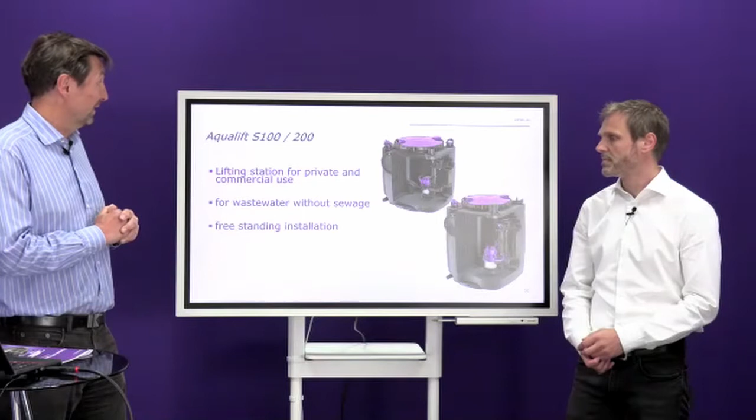At first, let's see what we have. We will show you the Aqualift S 100, 200, a lifting station for private and commercial use, so for both areas. It's important that this is for wastewater without sewage, not black water, so for gray water or rainwater. The third important thing is that it's a freestanding installation. We have a lot of products for installation in concrete, but now it's a product for above the floor. That's the important thing for this product.

What we want to show first is why we need this product, so let's look at the application. You see here it's in combination with the grease separator. It's a really interesting application because we all know we have a good bundle of products: grease separator, sampling chamber, lifting station - for example our Aqualift F or Aqualift FXL. But not all applications require a lifting station or pumping station for black water. This is a really nice example and a nice bundle that comes together.

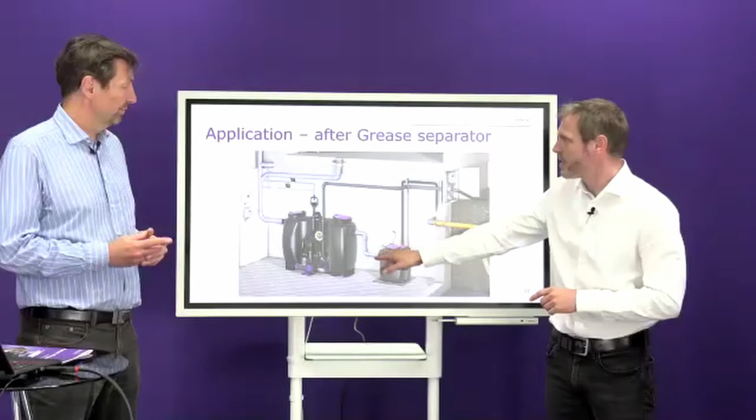Martin, do you see here, do we miss something? Oh, I see there is the outlet connecting to the lifting station. I guess, so in the training I always say you need a sampling chamber. Correct, after the grease separator. So it's forgotten here. I don't know, who did this drawing? I'm not sure, but you will explain me, I think. I think we will explain that because it's a nice feature that comes together with this product. And it's not a mistake in the picture.

So we have nice additional information for you regarding the sampling chamber. Most of our partners already sell a lifting station after the grease separator. Our Aqualift FXL is mainly for bigger separators, but now we have entry products for the smaller sizes of grease separator. Now we can offer a really cost-efficient, affordable lifting station for these sizes. We are really excited in the whole Kessel group to have this product now. It comes in 2 tank sizes.

We will show you more in detail later. This one here is especially a 200-liter tank, and we prefer the 200-liter tank, especially in this application. Later we'll show you some other application possibilities. But in this special application with the grease separator - NS2, for example, NS4 or up to NS7 - depends, but up to NS7 could be the right solution for you if you have such an object where you need a lifting station after a grease separator. So keep in mind, that's a lifting station for grease separator from NS2 to NS7.

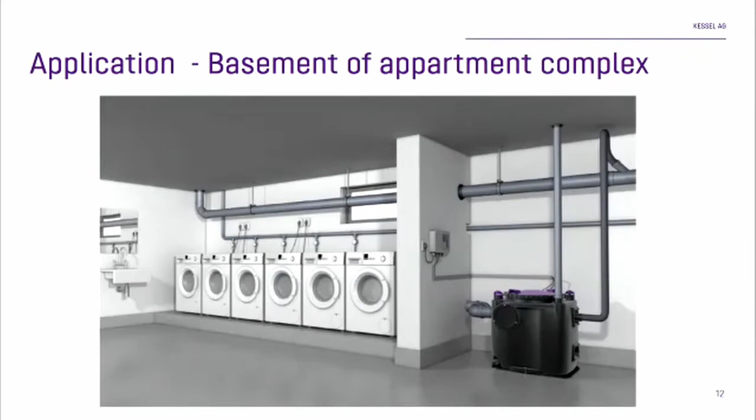I think it's very common - you see there in multi-story buildings, apartment complexes where they have the washing machine in the basement, then mainly they need a lifting station, right? We all know our mini lift. For example, if you have a private house, one family house, very often if you need a lifting station for a small amount of water - only one washing machine or a hand wash basin - water comes in. But if you have more water going in where you need bigger storage, this Aqualift S 100 or 200 could be the right choice in this application. And much more - there's a big amount of possibilities where you can use this product.

For example, if you have rainwater, thinking about parking garages, or rainwater in general, where you need a storage volume for that. But also in commercial buildings like offices and so on, where you have gray water that comes in a bigger amount, this bigger storage could be the right choice.

Right, so there we have already the entry product, the mini lift. Here we have the bigger size of that. So in this area, we have now a better solution for more volume, more flow rate. It's a new opportunity for you. If you have 10, 15, 20 washing machines, bigger complexes, could be the right choice. So the maximum, what would you say? Depends, but if you have 15 to 20 washing machines, for example, could be the right choice.

Yeah, that's very common in Germany, that you have washing machines in the basement altogether, right? And then you need a backwater protection, and you have to lift it. Here you see the drainage line to lift it over the backwater level into the sewage.

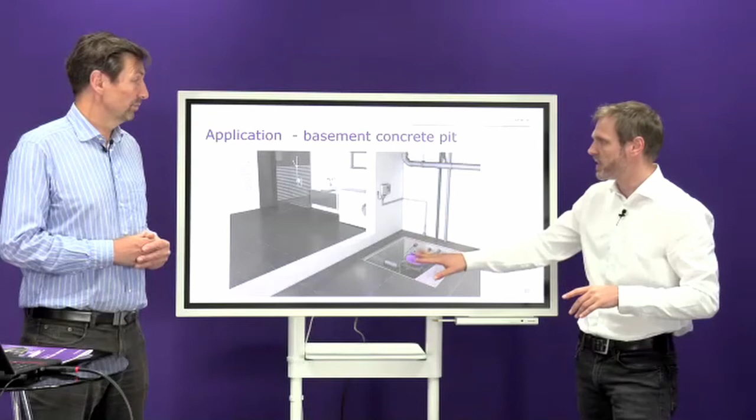Just one example, another example for how to use it, private or commercial, anyway — freestanding lifting station for gray water. That's now the answer for concrete pits.

But very often, another example, if you have safety valves for the drinking water pipe that goes inside the house, or back-flushing valves where you have a bigger amount of water that comes in such a tank, like 100 liters, a mini lift could be too small because the pump always goes on and off. You need a bigger storage volume. This could also be the right choice for such a product.

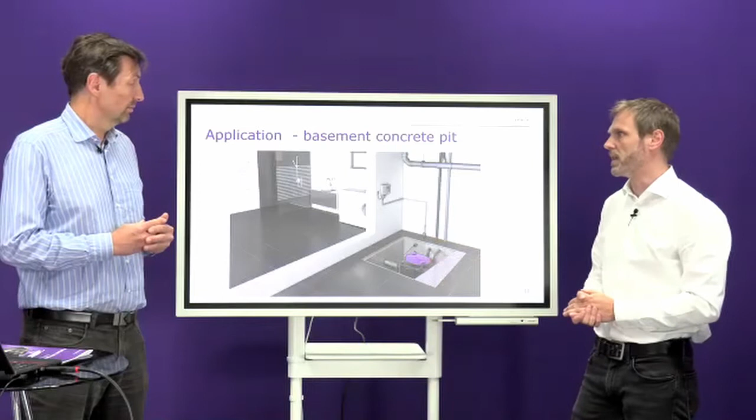Yes, let's go now into the details, what we have, how it looks like. Here are some figures or details already described, but let's go to the product. We also have brochures, Martin — you'll mention that later on? Yeah, later on I'll mention it. So you'll find all these advantages, USPs, and so on in the brochures. But I think that's why we are here — let's go more close into the detail of the product and let's show the product.

Let's go over. Okay, Martin. Okay. Yes, here we have the two-tank version.

First of all, that may be interesting for you if you order such a product — this is really a big advantage at Kessel. It comes in a really compact package. You order one article number and you will have all the products and all the parts you need to be ready for installation — the pumps, control unit, whatever — comes in one package. You order one article number, you have one product. Also, this is really important, it's a compact system.

So if you want to install this product in a basement, for example, very often you have to lift it, you have to handle it. It's really not that heavy.

So it's, but you're strong. Let me try. Yeah, yeah, okay. You look tired, but okay.

Later on we will show a competitor product, ACO. You may not have heard about it, but we want to show it as a competitor product.

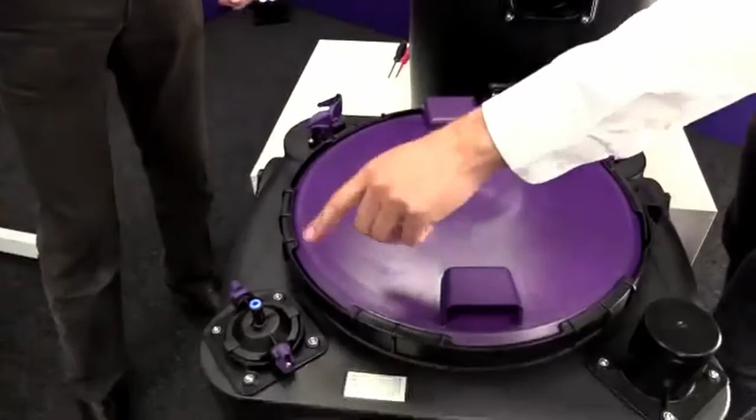Okay, please open it, we want to show what is inside. Let's go around it - we can do it on this bigger tank since the application is nearly the same. What you find on top of this product may differ; sometimes you see this clamp, or this one. The difference is because we have different versions here.

This is a mono version that comes with a floater switch. This is a tronic version with a control unit. There we have this pressure connection and this transparent hose - later on we will connect everything together so the product is ready.

But first, let's go the way of the water. If the water comes in, you need an inlet. We have three possibilities for the inlet. First, this big area in front of the tank can be drilled with our system using the hole saw, up to dimension DN100 or DN150, a typical inlet used here.

If you don't want to drill, because you don't know how big the hole should be, we have two other options - on the right side, and on the left side you see this plate that can be opened, where a prefabricated plastic inlet part comes with the product and can be directly installed. So you can use the inlet on this side or the other side, and you don't need to drill anything. Later on we'll show you this.

So this is the inlet - water goes in at the bottom part. You have this fixation so that once the product is installed, it doesn't move anymore, and the connections will be fitted properly.

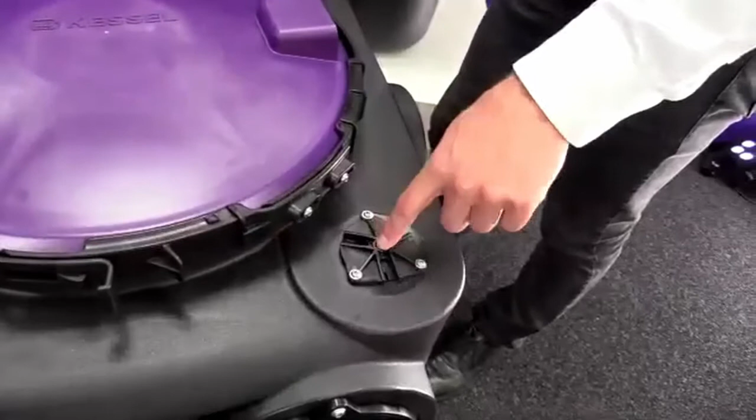Very important. Then we have the possibility for the cable outlet, and it's not a standard cable gland. Very often you find products with standard cable glands, and if you have a plug on the pump, for example, very often you need to cut it just to bring it through. It's a big hole, you open it, and you can install all the cables that are necessary for the inlet here, bring it out. Very easy to do. Two cables, two pumps, right? Two cables, two pumps, exact.

And on the other side we have the connection - this is the double version with a control unit, and this is the connection for the pressure, for the pressure sensor system.

So you can really easily open with this - it's new, you don't need to use a tool to open this, just two clamps, and it's easy to remove, especially for cleaning. It's very often, if you have grease separators, you need to clean it. It's very important, when doing maintenance, to clean this pipe for the bigger diameter, less blockages.

So that's mainly good for grease separator applications. And also on the top we have a quick connection that may be known from installation systems. If you have this pressure pipe, just plug it in, that's it, no need anymore for a thread like the older system. We know that most of our customers know that.

And we transferred it to all the other products as well. That's really important - during this year we will change it on all our existing pressure systems, whatever comes with it, on the control units, on the Aqualift F, XL, and so on. We have this really easy click system, plug it in, and this little untightness we had in some cases, this could never happen anymore. Is that right? Correct, yeah, right. Absolutely tight, easy to do, plug and play.

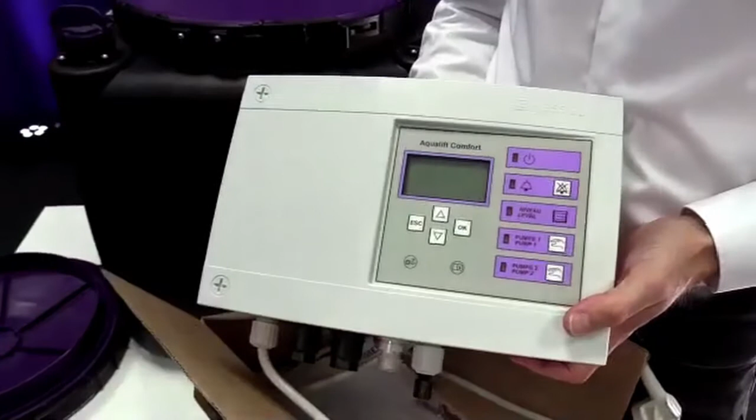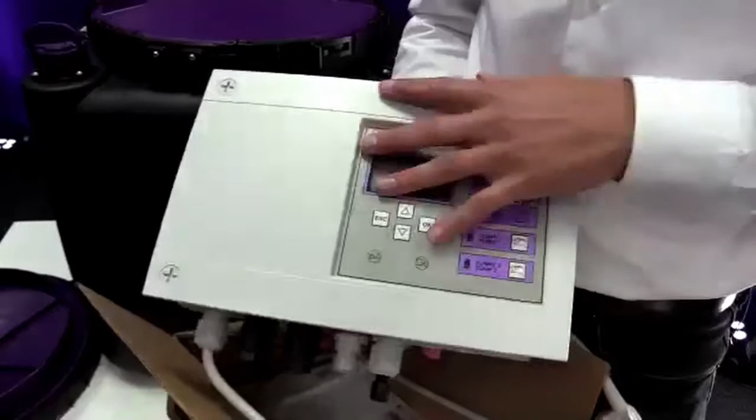We know that from our other products. So we have here our display. We have our languages where you can choose, and you get messages over the display. That is what we already have since many years. So nothing changed in the functionality, and you now can choose this special product, go into the product line and say it's Aqualift S100 and 200, say okay, and then it's great, already done. Okay. Martin, here you go.

Thank you. Let's look at the inlet adapters. As we mentioned before, for the side inlet, these are the adapters in DN100 or DN150. For example, if you have a grease separator NS2, the inlet is DN100, so you can use this one. And this is really interesting - or you can use for NS7, you can use this one.

And maybe, Martin, we will open it. I think it's maybe interesting. Should open the screws. Or you can open it just with screws.

Jan and Martin, we had a question coming in on inlet, so it's good that you're opening this so that people can see live how easy it is to get the required inlets done on site. And again, these are included with the system - so what you're showing there is included with the 200 liter tank. Yes, correct.

So it's Torx screws, so that you should have. This also is an important information - all the system comes with the same screwdriver, so it's the same size. If you want to change this one or this one or this one, it's always the same size of the screwdriver. So yes, here, and then you can install.

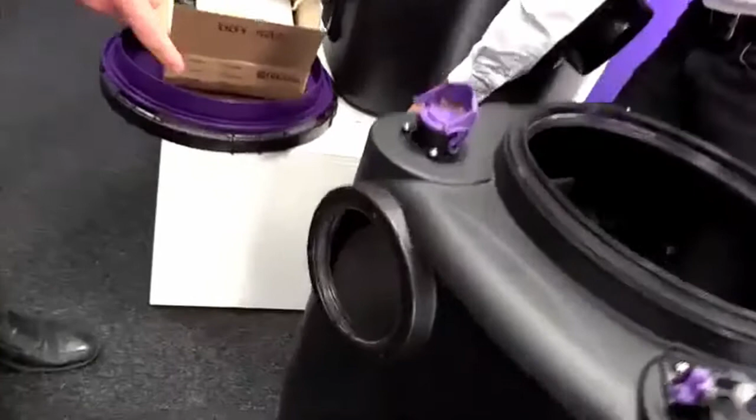The gasket is still inside - that's the gasket here. Of course, you need grease, and then - just easy, place it, put it in the right direction. I think we don't need to screw it in, just for example, and then screw it back.

And what is really interesting now, and this is something we want to show you with the camera inside - we talked about grease separators, and we said here we don't have the sampling chamber, and the sampling chamber is included in this lifting station. So you open the cover, you go with your sampling glass inside and put the sample out of this. And this special lens here and this special height of this inlet is regarding the norm - it's a norm-proofed sampling possibility. So you don't need a sampling chamber anymore after grease separators.

I think so, instead of a sampling chamber, you can invest the money in the lifting station. Correct, right? I think it's an interesting feature. Yep, and that's right. You're good. Okay, and next one is the pump.

I want to mention, these products come in 2 tank sizes and also 2 pump sizes, so whatever power you need. It comes with the GTF 600 and also the more powerful GTF 1250 - the names indicate how many watts the pump has. Here you see the performance curve of these 2 pumps: one reaches up to 8 meters, and the second nearly 11 meters.

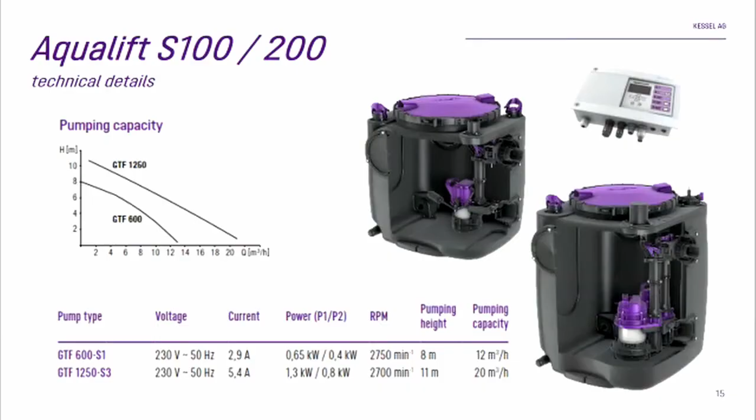Let's take a look at how the pump looks like. I think it's not very unusual, a standard package. And here it comes with the GTF 600.

One interesting thing is that it comes with a free passage of 30 millimeters, not 10. This gives you more space if you have bigger parts, maybe some stones or something like this, so it doesn't block. It's really more powerful compared to our standard pump, the GTF 500, which only has a 10 millimeter free passage. The GTF 600 has 30 millimeters, and because it can breathe more, this allows a more powerful curve than the GTF 500. The bigger pump has the same feature as well.

And here you have the quick plug, which protects the wires, and can be directly plugged inside the control unit. This end plug is important because during installation it could be underwater, which could be a problem if water gets into the wires. It's really easy to connect to the control unit - you don't need to be an electrician. Plug it into the control unit, plug the control unit in, and everything works fine.

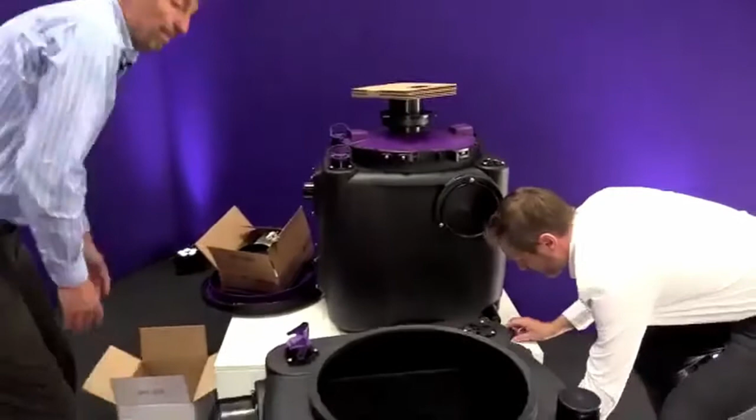Okay, good. But before we go on with the pump, I'll show you the connection. This is the isolation mat, which comes underneath.

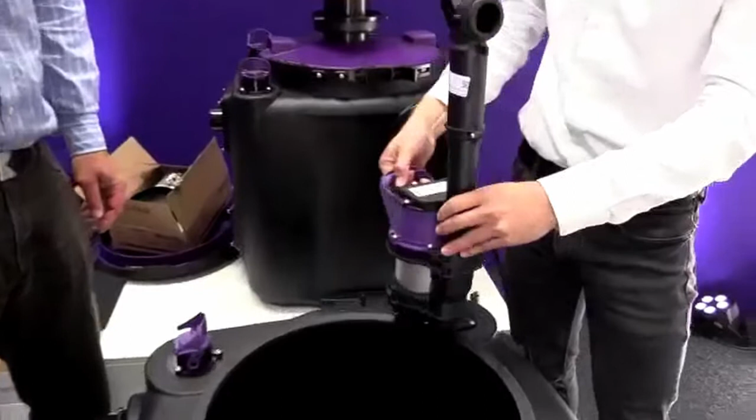All the other things like the manual, the pressure pipe, and the seals - we talked about the DN100 and 150 seals - are inside this package. First of all, we have 2 pressure hoses for the pump that need to be installed on top of the pump. This is one of the main advantages compared to our competitors. You also have 4 screws still inside the package that need to be screwed in - maybe you can do it.

A question from Ghassan in Lebanon about cable sizes - how far can the control unit be away from the system? Pump cable lengths and pressure switch hose length are both 5 meters, and the same for the second pump.

Here are the gaskets, and here's the adapter for the pressure outlet connection. You glue it, put it inside, and then you have this thread - a 1.5 inch thread. Then inside the package you also have this pressure hose.

As I mentioned, just look how easy it is - plug it inside and it's fixed, that's it. If you want to open it, just press this blue ring down and it's out. Let's do it again: put it in, locked. Press this blue ring - voila, it's out.

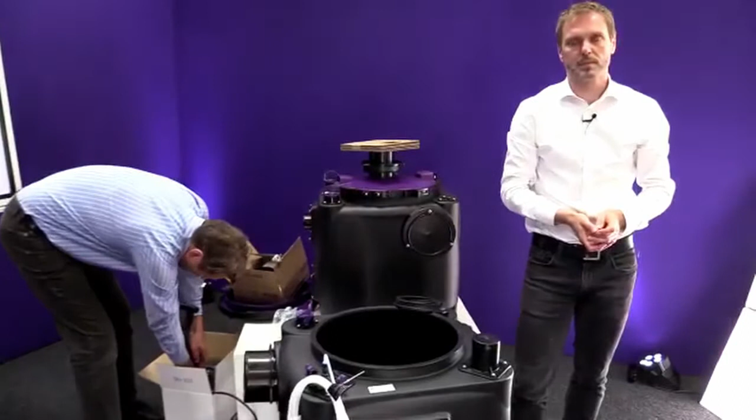But I will ask the question - can we use the high-end hydrostatic sensor in these above-ground tanks? Yes, definitely, though it's not part of the standard product. The product line comes with 8 different articles, but we also do individual solutions very often with other systems. There may be some interesting information for you, but maybe at the end of the year I'll have really interesting news about the hydrostatic sensor - I don't want to spoil the surprise now. But it can be used also with the Aqualift 100 and 200.

So let's see - this is what I like most. Already ready? Here, just a quick release. You just have to put the pump in, and then you have this.

This is what I like most: the quick release hand lever to put it in and take it out easily for maintenance. I know other solutions from Kessel and other systems, and I think this is one of the biggest differences regarding the competitors. You don't need any tool to open the pump.

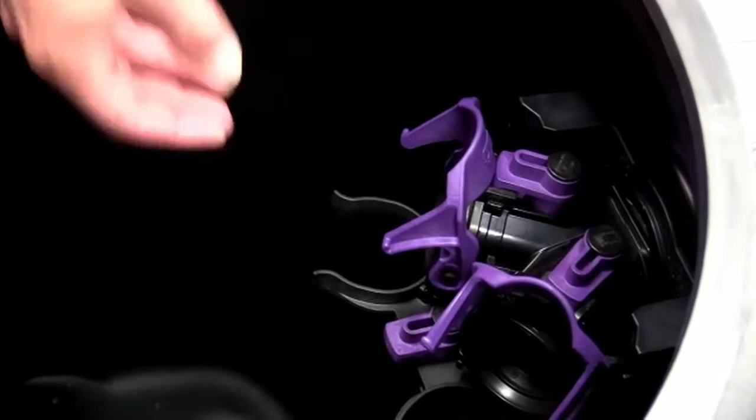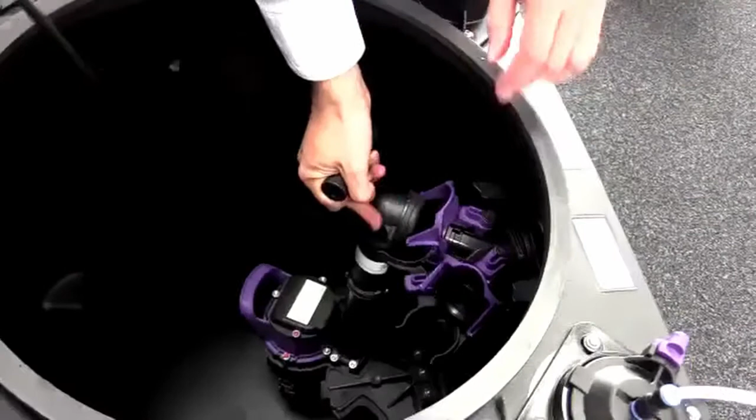And also the backflow preventer - you have this quick release opening. You can open this part, bring out the backflow flap, put it in, and close it. It's really easy. Maybe we can do the pump inside again to show it. Close it, and that's it. That's really the biggest advantage.

And the cable - I think it's clear. You open this and bring it, come a little bit nearer, bring this cable in this position, put it out for one pump, second pump. That's it, that's right, to make it tight going through here.

One thing I want to mention, Martin, is if you need an extra alarm unit, like a floating switch alarm unit, independent alarm - we have it in our catalog. This extra floating switch can be placed here, or if you have the entry product like the Aqualift 100 which comes in a mono version without alarm or control unit, you may need it later on. You can also use our standard alarm unit, article number 2022, and implement it here.

So altogether, the S200 is for grease separators because of the pressure sensor and the bigger pipe without blockages. The smaller one is more for washing machines in basements, in concrete pits where you need compact sizes. All of them have 4 possible inlets included in the package. You can drill your own height, which is important so you're flexible in height when the inlet comes, or you use the prefabricated inlet. That's a good package, right?

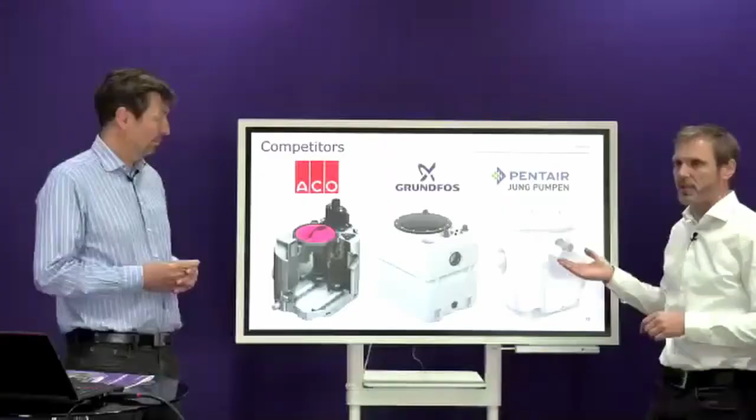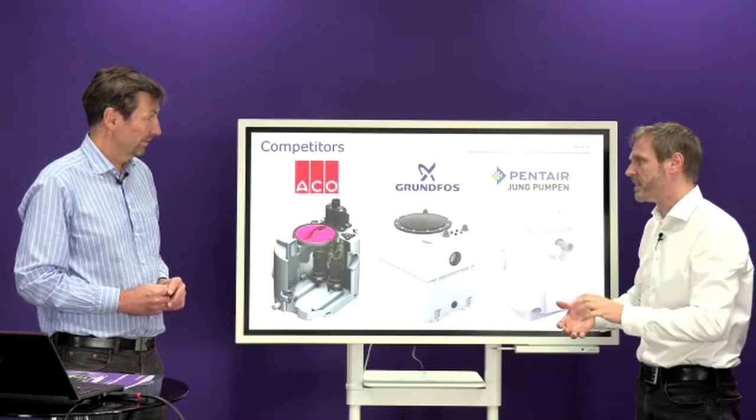Okay, then let's take a look at this one. Maybe let's go over there, Michael. You can bring it inside - let's come on, push.

Could you please bring it more this way, Martin? Okay, so what you see - it's not a joke, it's really heavy. Maybe you can do it again. It's wow, it's really heavy. Compared to our product, this is a really heavy product.

The main reason is they use cast iron housings for the pump. And cast iron together with grease separators, which are very often corrosive, may not be the best choice.

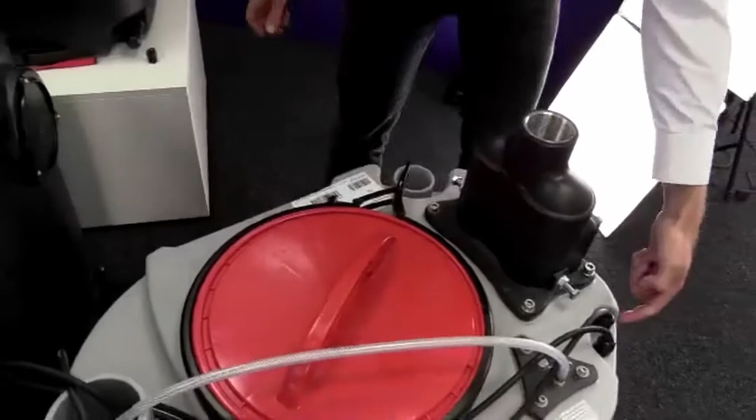Okay, let's take a short look inside. Very interesting - here they have the old finger clamp solution, like we said, the cable outlet is a standard cable clamp that's glued inside. Don't know if it's good - to be honest, water goes out here. When we tested this product, it was not watertight. Or here, this is for opening. Go back to the pressure sensor system - you find that with Kessel.

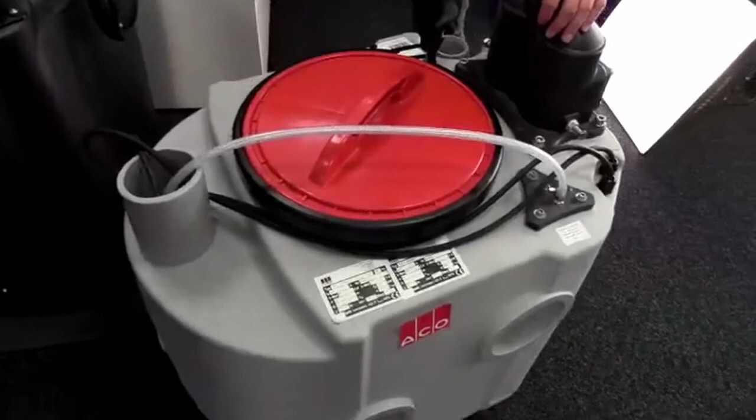You have this system here. If you want to open it, you need the screws here, and so on. That's how they do this. Okay, just don't waste too much time on that. Let's just show what it is.

And you look inside - that's also really interesting. What you see inside is, because it's connected in the company, pre-connected. So it means it also comes with a control unit, and everything is pre-connected. You see the pipes and the cables.

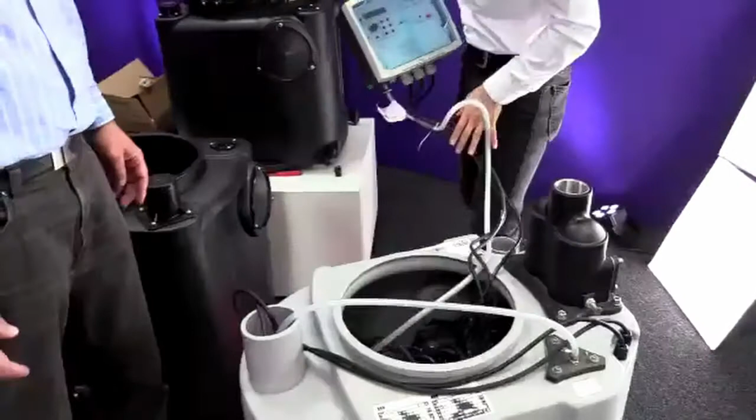It's nearly the same. This may be an advantage, but you see all this mess inside - a lot of cables that you need to re-wire, whatever. But I think the main advantage is, if you use the Kessel system, you have the same advantage - you don't need to be an electrician, just a quick clamp, bring it in here. I've shown before, it's so much easier, and you don't have this mess cable wire complicated system.

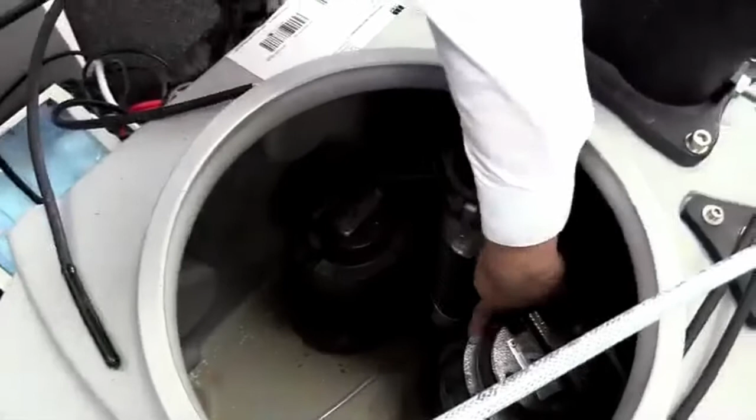And here we have the pumps. You see it's a little bit dirty because we tested this product some weeks ago, and this is really interesting - they try to use a quick release connection like we do.

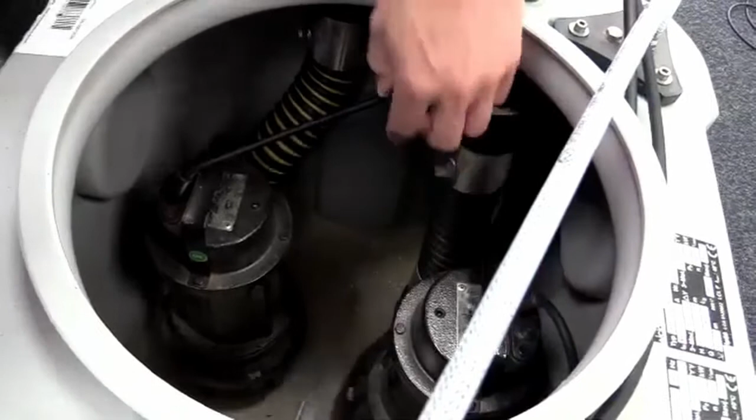So, Martin, maybe you can try it - it would be good. If you try, maybe the camera can show how it looks like. You need a camera to find the way to connect it.

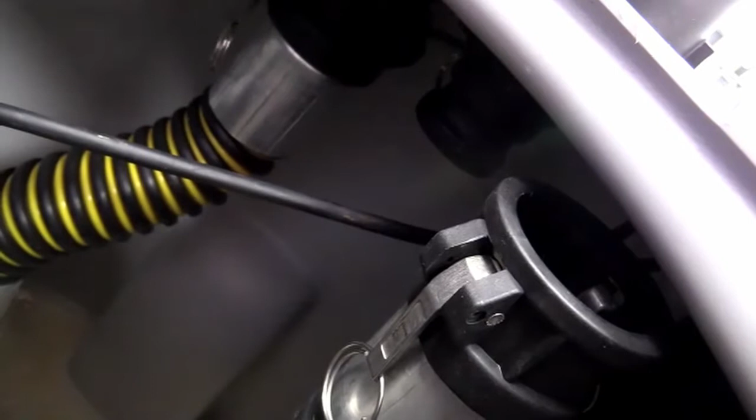It's really, to be honest, nearly impossible. A lot of people in the company tried to do this. It's so much more complicated than what we do. It's really stiff - this pipe is stiff, unflexible. Martin, please don't hurt yourself.

I cannot imagine that it works that way. After 3 hours, if you finally found the right position of this hose, and you turn on the pump, then you realize it's not tight. So that's right - but it's just an example.

Just an example to show that both tanks are nearly the same size, nearly the same application situation that the products are meant to be used for. It's nearly the same connectivity, but in detail, the products are totally different. This is just to show our partners the difference, so they know it when they have to communicate with their customers.

And that's the connection mainly, the weight is that. Also maintenance - if you always have to do maintenance on the product, here you need all the screwdrivers to open the flap, to open the pressure sensor, and so on. And last but not least, it's not tight. That's maintenance without tools - that's our philosophy. Correct, that's what we do here as well.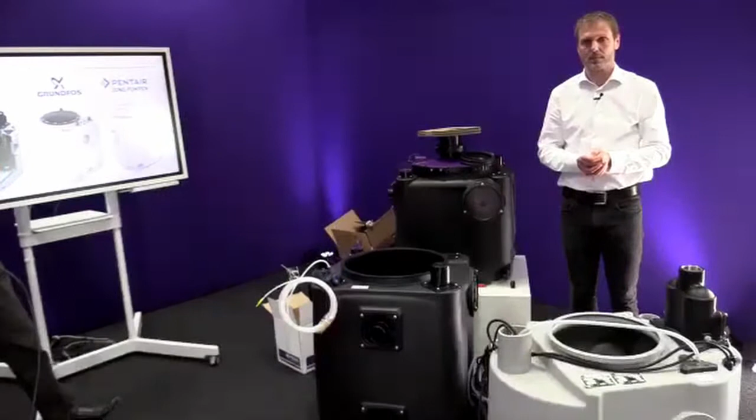Jan, a question here before you guys finish up, from Dave - also a very good question. Smart Select, our pump selection program - we've got some new pumps available here, some new tanks. Dave's question is, are these in Smart Select already, or if not, will we plan on putting these in Smart Select?

Very interesting question. Martin, you will now talk about the marketing brochures and Smart Select. Yes, it's included in Smart Select - you can go there and find this product. You have to look for the pump name, the GTF 600 and GTF 1250, and you come automatically to this product. Or you choose Aqualift S 100 and 200. Both ways work, and you find all the versions that come with this product range, product family.

Okay, finally, how you can promote the product to your customers. There is, of course, a brochure available - here it is in my hand. What you can do right now is download the brochure with all the information we've shown you. Here is the link to this brochure, and then you immediately have the digital version of this lifting station S100 and 200 with all the advantages, applications, article numbers, and descriptions.

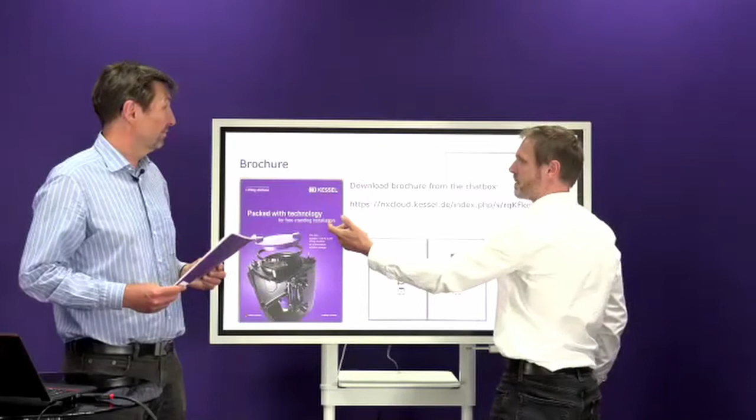And over the internet, of course, you get the CAD data. If you type in the product number, you get the CAD data and the manual as well. It's very easy - on the internet site, at the top, there's a product search box where you type in the article numbers, which are in this brochure.

So please download the brochure, then you have all the necessary information. If something is missing, you know our numbers - just call us or give us a short email, then we will get in contact with you to give you the information that's still open.

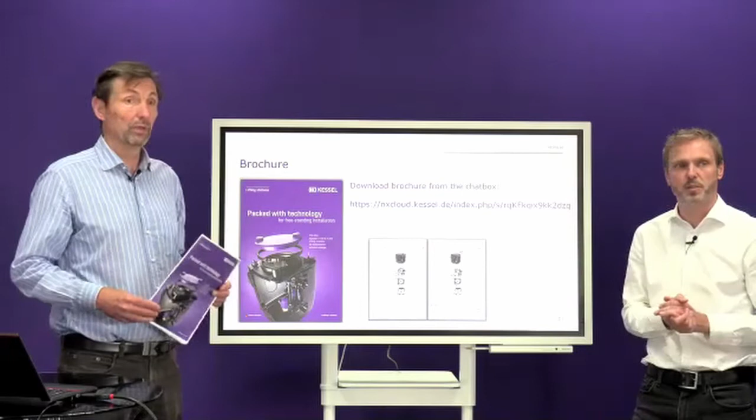Right, something else, Jan? Really looking for feedback - if you are really interested in this product, I think there are a lot of applications where it is very variable and flexible in use. Okay, that was for the Aqualift S 100 and 200.

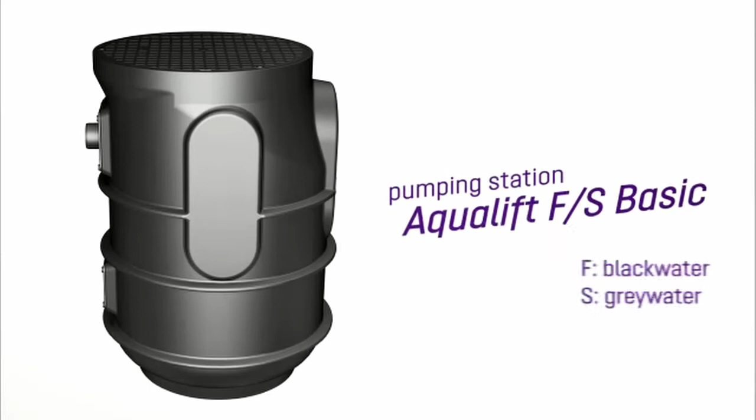The new Aqualift Basic pumping station from Kessel is a compact, heavy-duty built system for the disposal of domestic wastewater.

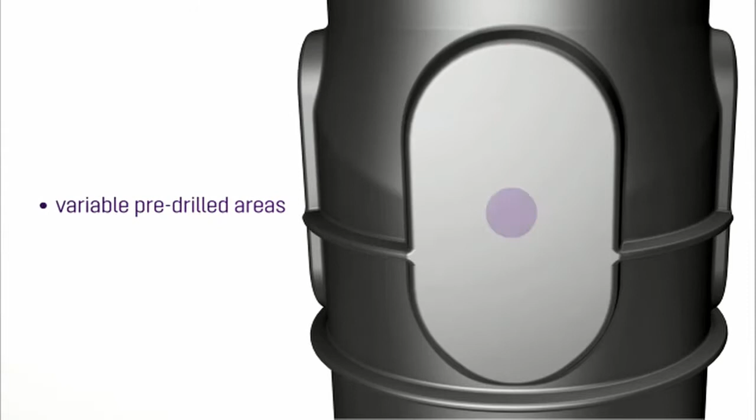The tank's stability comes from the thick walls, and the vertically adjustable upper section makes installation underground quick and accurate. Multiple drilling areas on the exterior of the tank allow one or more inlets to be connected if required. The system is available with 3 different pumps, making it ideal for use with wastewater with or without sewage.

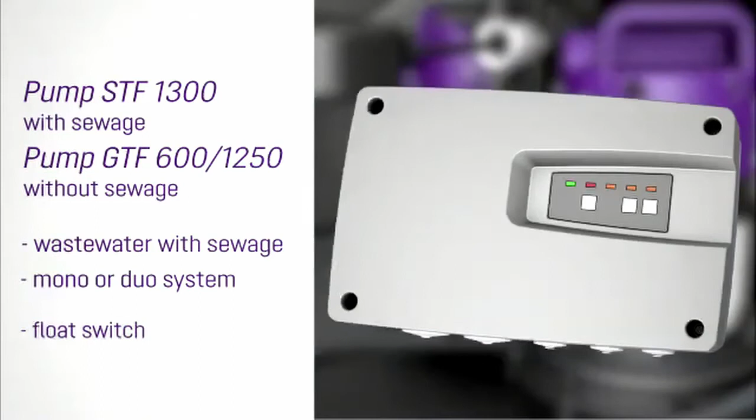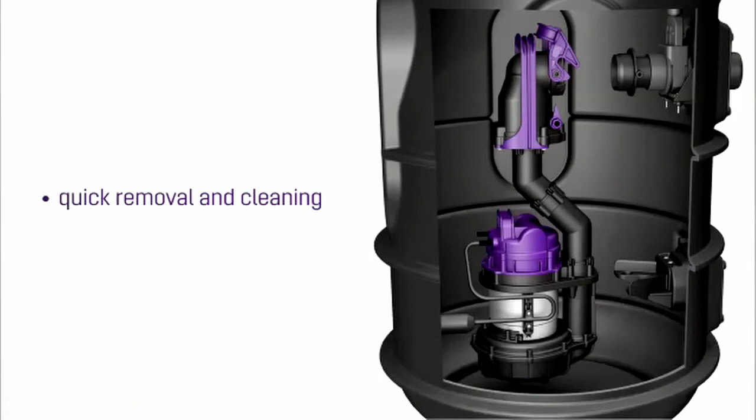Models with single or twin pumps, as well as with float switch control or the tronic control unit, will cover whatever specification is required. The tronic control unit has been designed for intuitive operation, and an integrated alarm signal offers additional protection. The suspended pump design means that pump operation noise is not transferred to the building, and the toolless single-hand quick release system allows pumps to be removed or installed in seconds.

The unique Aqualift basic design also allows it to be upgraded from a single to a twin pump system even after it has been installed. An available extension section allows deeper underground installations.

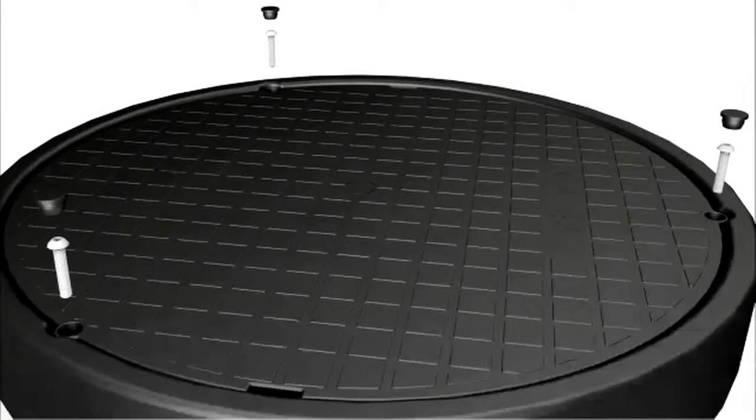With or without the extension, the included screwed cover remains leak-tight during longer periods of precipitation and is additionally protected against unintentional opening. The comprehensive range of accessories can also be retrofitted and make maintenance and operation of the system easier. Professional technical consultation, product training, and spare parts with a lifelong availability guarantee, only offered by the market-leading Kessel service.

Okay, so we're back on screen. Martin jumped away from the camera for a few minutes, you'll see him again in a little bit. I'm jumping in. Jan, well done from Martin. He's taking a coffee - no, a Coke - but he'll be back.

We're not finished with him yet, but again we're going to stay with Jan for the day. Florian just played the video - again you can see that's the pump station.

We're changing now from our above ground lifting stations. When Kessel say lifting station, we mean above ground indoor systems. And when we say pumping station, we mean outdoor underground.

So Florian just played that video. You can see from the high quality of the video the time and effort we put into things like the video, the brochures, the installation manual, and most important, the product. So the first time you get to see this product, I guarantee when you take it out of the box and show it to the customers, everyone's going to be impressed, and they can see the Kessel quality we spend all our time developing is included in everything around these type of systems.

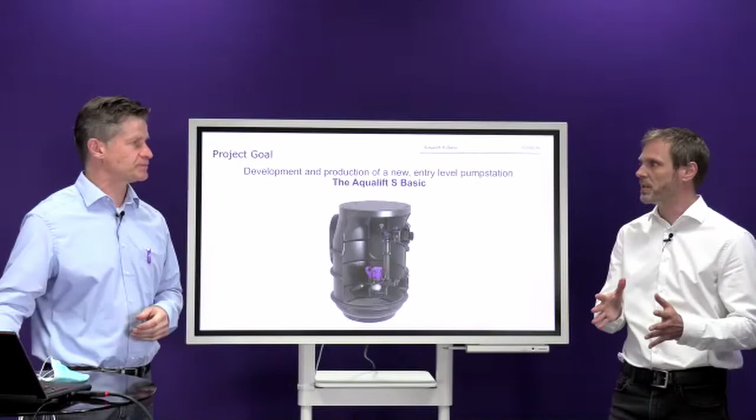The goal, again, we need to have a reason to do this. And again the goal is to develop and produce a new entry level, price market acceptable, entry level system on the price level, but again still with all the power and all the technique that we put in the Kessel system. I think 2 years or 1.5 years ago, we introduced our new Aqualift F basic pumping station for

Blackwater. And the market prices for these products are sometimes very, very low. It's a good entry product. As you mentioned, it's meant to be used outside of the house, in the ground, very easy installing,

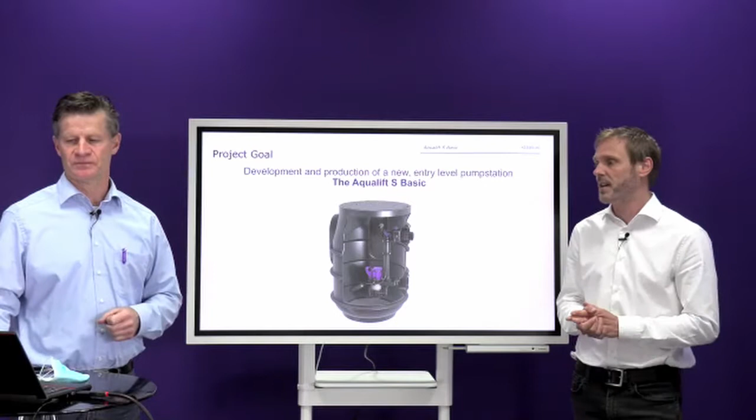easy working pumping station with a good and really low and attractive entry price. And the market asked us, after we introduced the Aqualift F basic version - the market prices for gray water systems are still lower in the market - do we have the same things? And we thought, okay, why not introduce a gray water system also? And now we have a good family: Aqualift F basic pumping station, and the S version.

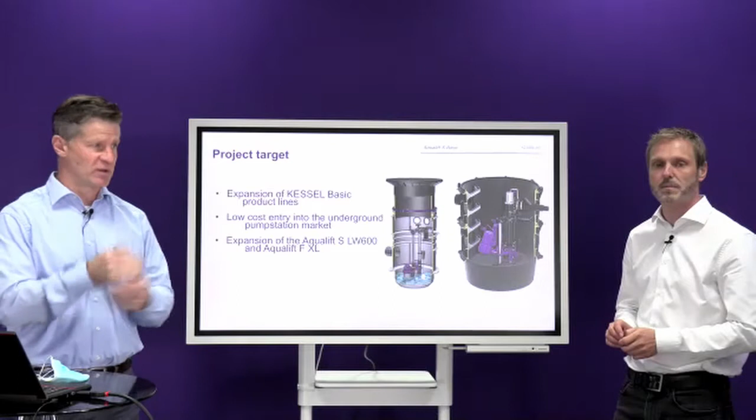Right, expanding the family. When I look at the chat box, there's a price question on the systems and the above ground systems. The same question will come for our underground systems. Jan, you mentioned that quickly - that was the main goal of this, to meet that request. Those are going to be coming out, I believe, the next week or two. I believe Michael will be getting that all sorted out, and we'll be getting you the most important part of this, which is the pricing. So that's coming out to you, not fixed yet, but coming out very soon.

So we had the goal, now we have the target. You mentioned this expansion of our Aqualift S line. We're also talking about the pump station F. Martin mentioned this before—S as in sun, gray water, not sewage water. The pump station F as in fun is for sewage wastewater. So here we're expanding the line. We've had a larger underground system, our system LW600 Aqualift S, and now we're going a step smaller, I guess you'd call it.

Don't see it here... there. Basic 600, there we see, yeah. So XL, now new to the family, what we'll show you right now is the underground pump stations S, which is brand new, and the F, which we're sort of reintroducing again today.

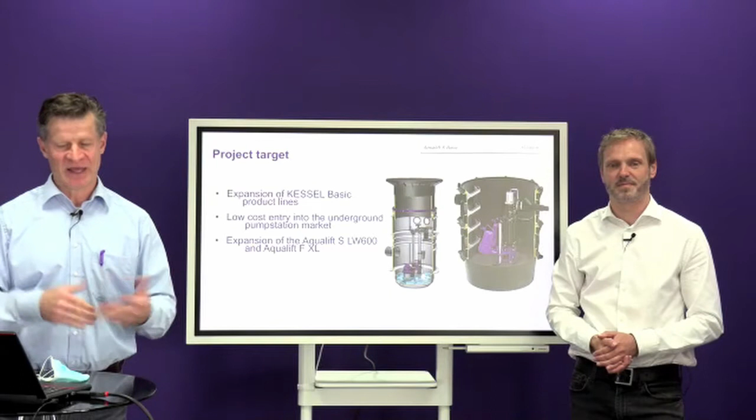Areas of application. Before we started the film, before the cameras ran this morning, we had a 15-minute heated discussion, as you'd call it, about the areas of application. We're getting new pictures out for you to show you and the consultants and your customers, just to give them ideas of where these things can actually come into play.

A common one, again, the above ground ones for above ground separators, the pump station S, also for underground grease separators, smaller grease separators. Definitely. Standard system would be a private home where you have wastewater with or without sewage below sewer level. That'd be the most classic application.

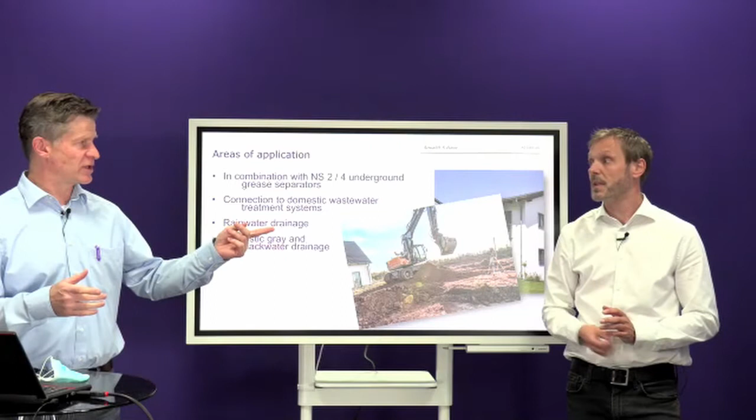And you mentioned some others this morning. Yeah, this one is small wastewater treatment systems. We had some products in line years before—InnoClean, for example, was our name. And a lot of systems are out in the market. This is really a good example where this product can be used.

We have that case up in northern Scandinavia, Sweden, Norway. I know Chris from GP Norway and Vidar are looking into that. There's lots of those sold. We're having a little bit of difficulty on pricing, but it's a very common thing. You build a house not connected to the public sewage system, you need to treat your own water, and sometimes need to get that water to the treatment system, or after the treatment, you need to pump it up and possibly then to a public sewer level if you're connected.

So this is the target applications.

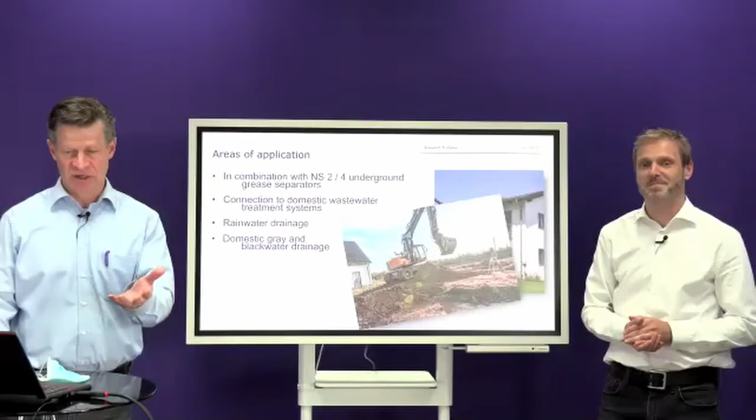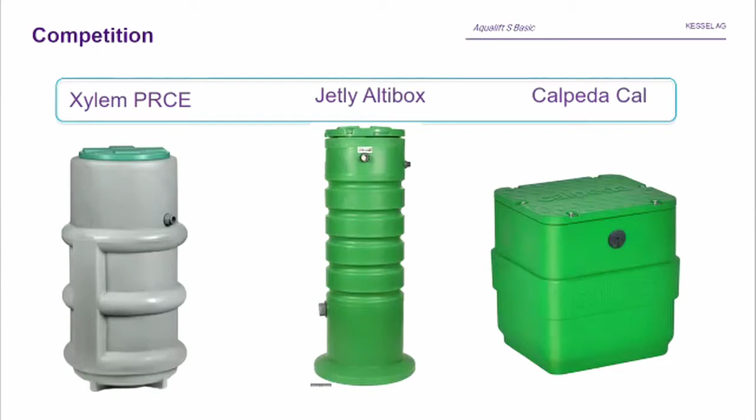Quickly, we're going to just show the general competition out there, not go into the technical specs. Every market has their own competitors and their own products that are in the market. Maybe interesting for us to get feedback—what are typical products for Aqualift S100, 200? What are in your market typical products, or for the pumping stations?

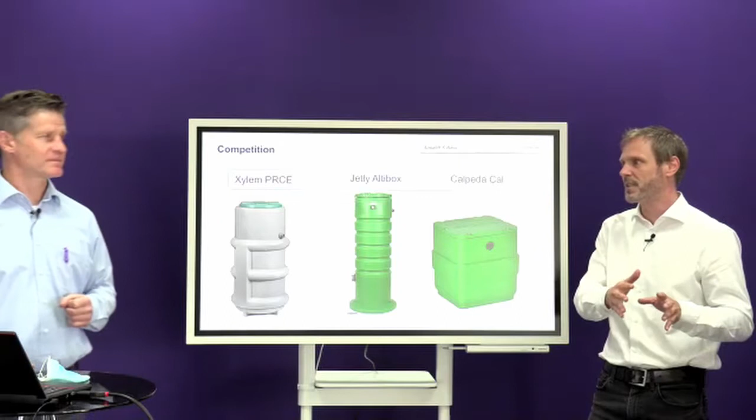This is just a short example, and also, these are really—how to say it? I don't want to say cheap products with thin wall thicknesses, and sometimes very easily made products, to be honest. It's really not comparable technically with our products, but price-wise it is. So meaning you need to take a closer look and make a proper comparison.

I believe like the above ground systems, the underground systems, everybody's got their rotomolded tank, probably out of polyethylene. But as we'll see in a few minutes, it's what's inside that gives you the advantage when you move to a Kessel system.

So we're going to talk about the two now. This is a typical application—we're connected to a domestic or private home without a toilet. So here we're talking about the pump station Aqualift S for non-sewage wastewater, and this would be your typical application: wastewater collected below sewer level, so you need to collect that wastewater, then pump it up to sewer level. Again, these are smaller systems, so the wastewater amount is somewhat limited as well as the height. But in these classic cases, this is our new price competitive market entry system.

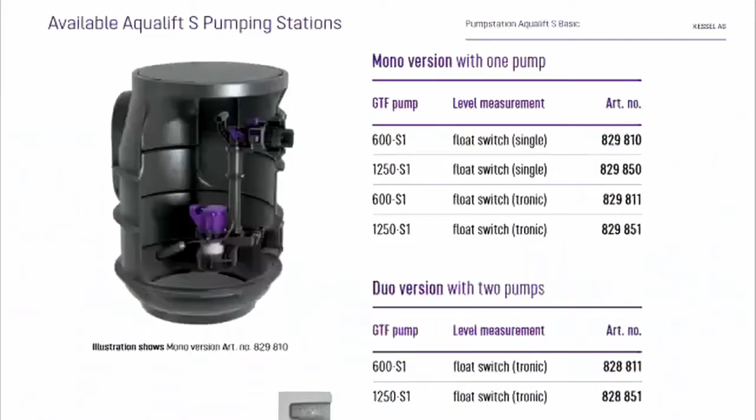So what's out in the market, what's available, Jan? Again, it's not one system, but the system you see on the screen here. Yeah, 6 different articles. The F version we show later, Eric. F version, yep, correct.

So this is the gray water version. Comes in 6 different versions: a mono system with a standard floating switch without control unit, a mono system as a Tronic version, Tronic meaning with control unit, and a double version. For example, after grease separators, you need a double version, also with these 2 articles.

And you see the pumps: GTF 600, GTF 1250. These are the same pumps we've shown before with the Aqualift S100 and 200. So the same pump, same power as on the freestanding version.

Now with above ground, we saw some with the pressure sensor and pressure hose. Here with these underground pump stations, we're only working with float switches. It's more reduced, a basic control. You see it down here.

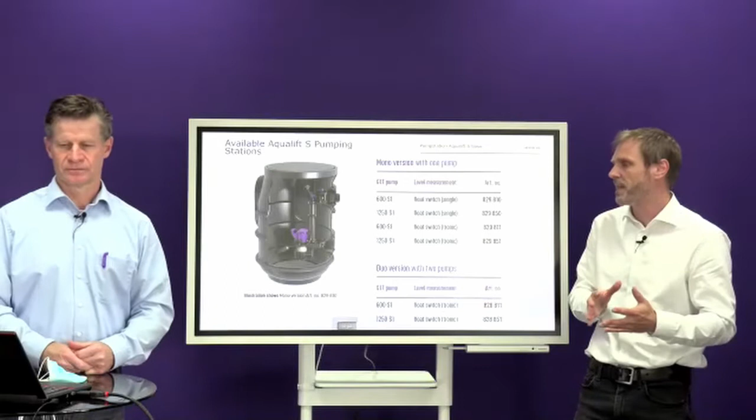It's more an entry level control unit that fits perfectly in the market. A standard product for a manual starting pump with alarm unit and so on, but it doesn't have the screen where you can use all the maintenance functions. It's more a standard, entry level product. That's why we can bring it to market at a really attractive price. And to be honest, the competitors don't have such a good control unit.

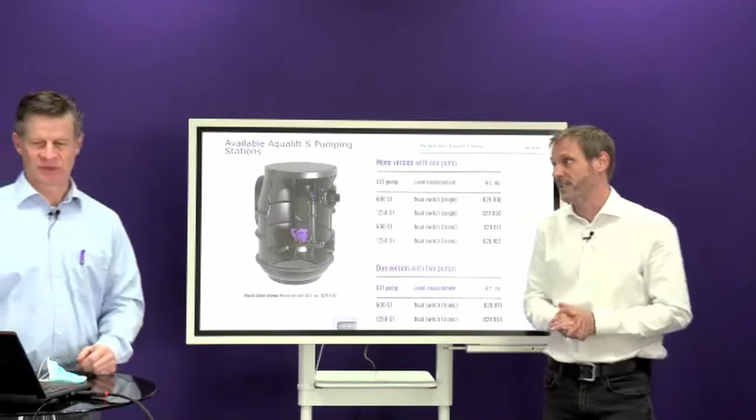We'll see that in a second. We have one here, we can show you this basic control unit, as we call it.

Also important is what they can do. There's two different pumps Jan just mentioned, with two different pump curves based on the volume, but more important, based on the height. I ran a test 2 days ago in Smart Select, I think I have a copy of that later. So you'd want to input how much you need to pump and how high you need to pump it, then Kessel Smart Select would tell you which of the Kessel systems is perfectly designed for your application.

This is really a hell of a pump, a good and powerful pump. I'm really proud to have this pump now. And who makes the pump, Jan? Kessel.

A couple weeks ago we were here taking apart some competition systems. We found out the person that makes the pump is not the person that makes the tank. So let me give you a quick test, Jan. Who makes this chamber? Kessel. Who makes the cover? Kessel. Who makes the pump? Kessel. Who makes the inlet device? Kessel. Everything is Kessel made, and when you feel what's behind Kessel, the quality, the importance we put behind quality, you know everything in the system comes from the Kessel household and is designed to our standards.

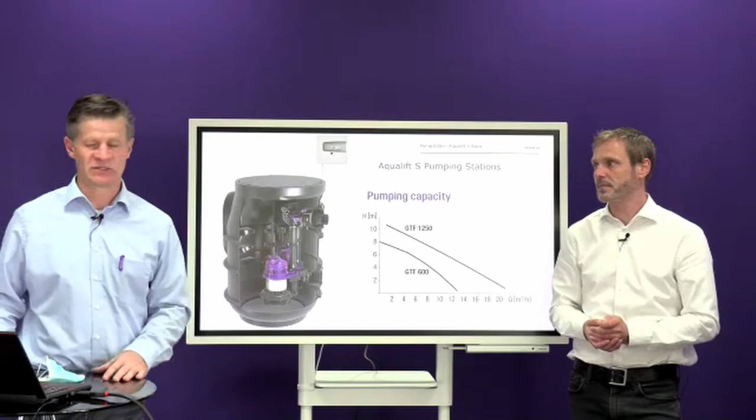One advantage you have with this: because we make all the parts ourselves, the connections between all the parts fit perfectly together. It's not like you buy things anywhere and try to bring them together and green and black don't fit. Here we have products that are absolutely perfectly designed to connect with all the other systems we have. We know what we're connecting it to because we made it ourselves.

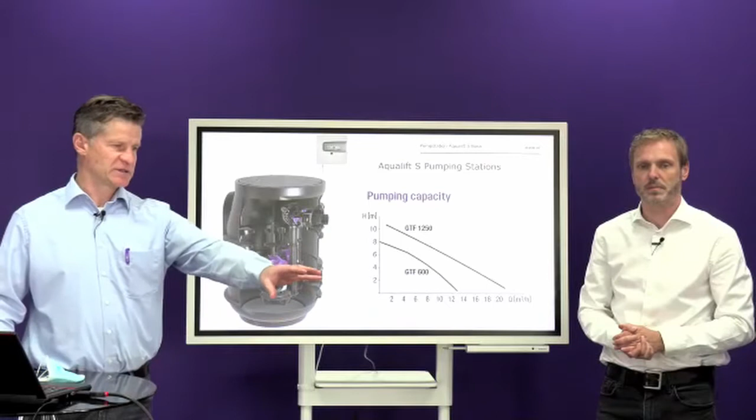I wrote in the chat box earlier, our pump removal takes about 5 seconds to remove our pump from the above ground or below ground systems. With a competitor's product we looked at earlier, it's extremely difficult to do. So about 5 seconds to remove a pump, and about 5 seconds to put it back in. And this is easy here, we're in a dry, well-lit, warm environment, and that's often not the case in real life.

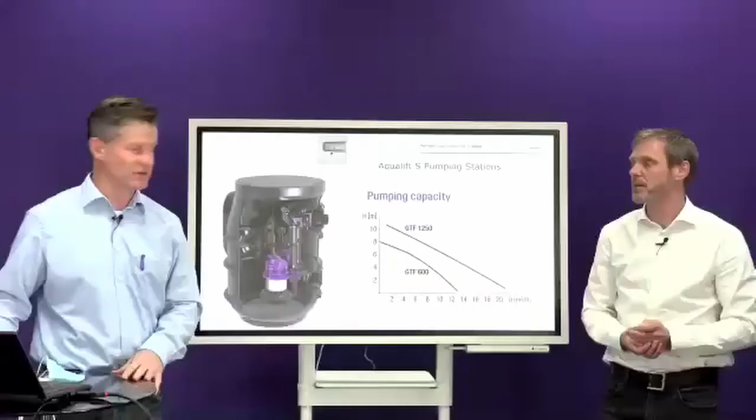So we're going to move now to the pump station, Aqualift F Basic, with a toilet. The only change now is here we have a toilet, so now we have pumps designed to pump wastewater without a sewage connection, or as you can see here, with the toilet connection. So again, this is the pumping station Aqualift F. Here again, Jan, are the different models available, if you can say a couple things about the different models.

Mono system with and without a control unit, and also a double version. This version only comes with the bigger pump, the STZ 1300. It's nearly the same pump characteristics as the GTF 1250.

But the question may be, what is the difference, Eric? It's nearly the same power, but the difference is the free passage of the pump. The black water version comes with a 40 millimeter free passage - regarding the norm, you need 40 millimeters. And as I mentioned, the gray water version comes with a 30 millimeter.

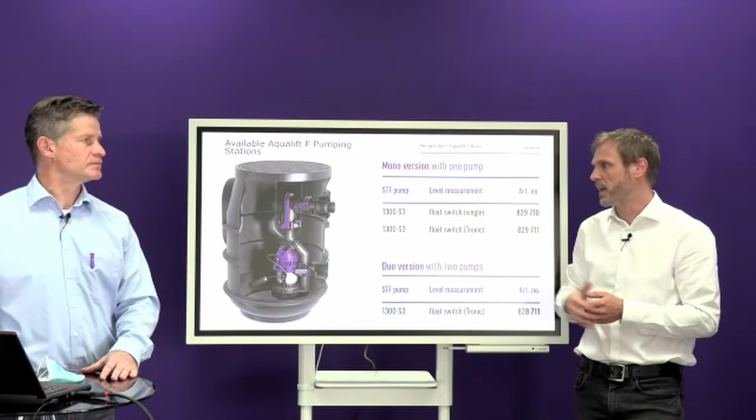We had that question also in the chat box. A lot of new pumps coming out, things get complicated, I've sort of lost sight of everything. So it's good to take some time, look at the catalogs, look at the brochures to see what all the new pumps can actually do.

So here's the single or twin pump underground pumping stations. Here's the curve for that single pump we have, the STF 1300. That's a submersible sewage pump.

These systems, the underground pump stations, are all float switch controlled, and the basic control unit is ready for the float switch connection, not a hydrostatic connection. Very comparable to the customers in the market.

Another question is, what do we do when people have concrete chambers and want to use only submersible pumps? What can we say to them? Without replacing their concrete chamber? Yes, if they say, oh, that's the old-fashioned way to have a concrete pit and then use submersible pumps.

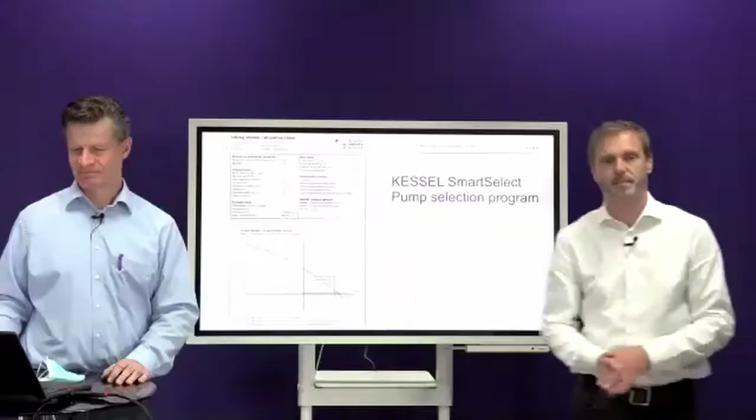This is the question, just let us do the questions. What is the maximum installation depth? How deep underground? We'll show that in a second.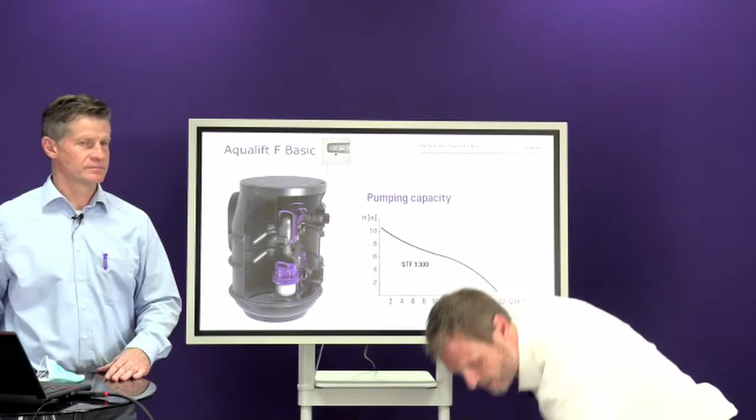There the advantages of our quick release system are even better, because now you're outdoors bending over in a dark hole. I haven't seen how the competition does it, but as soon as you need a screwdriver or any type of tool outdoors underground, it gets difficult. So here we've got the same, I'll call it the 5-second quick release pump - Jan does it in 4. Again, that can easily be done indoors or outdoors.

But if you need a bigger installation depth, this may be the question - we have the LW600 chamber or our XL system where you can go inside the tank. Then you can use it up to 5 meters installation depth, for the bigger systems.

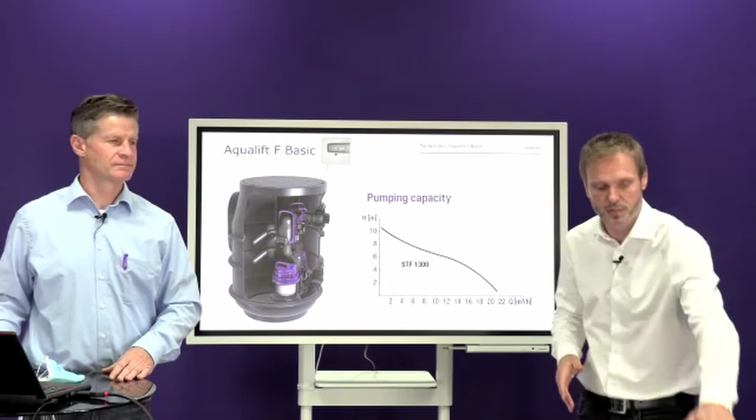Next question is, what's the load class of the cover? It's for pedestrian use with 300 kilograms, but it's tested for 600 kilograms to be honest. So 600 kilograms, it doesn't matter. But on the top of the cover, you see here, maybe let's go deeper - there's the camera.

Up, you see 300 kilograms. This is the load class, which is actually a very good question.

If this is not A, it's not B and not D, typical, but it's for pedestrian use. So if you had a case where it's in your driveway, you need to move away from this into our 600 chamber with a cast iron manhole cover, for example, typical in the garden. So if you need to drive over it with a car, you need to move to a different Kessel system.

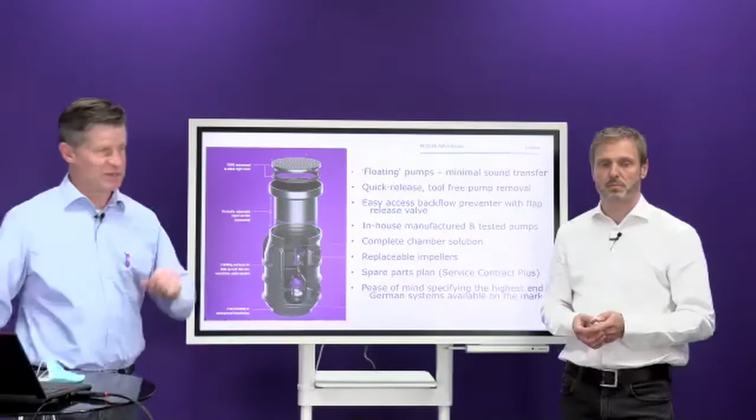Going to finish up basically, and then we'll look at the products quickly live with some of the advantages. We haven't mentioned this before yet today, but all of these pumps float. So we're outdoors underground, any vibrations is probably not going to be an issue. With the indoor systems, we've got the anti-vibration mat underneath, but also the pumps float.

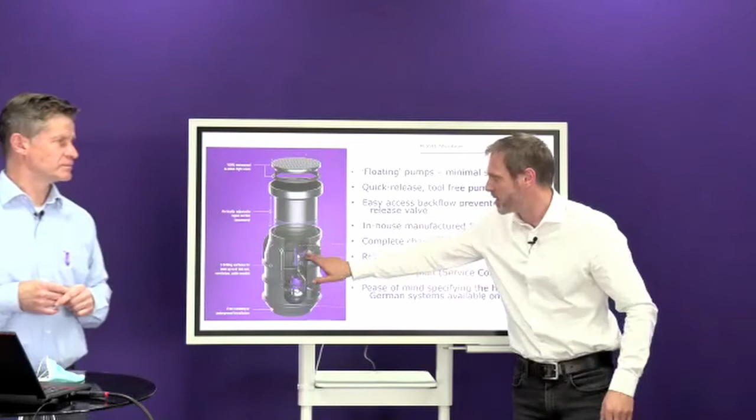So the pump connection to the tank is a gasketed connection, a rubber decoupling device, and the pumps don't sit on the bottom of the chamber. You see it here, it's not placed on the bottom. So if the bottom changes and switches and moves because of maybe groundwater, whatever kind of pressures come to the tank, it doesn't matter for the pump. At the top it's flexible, at the bottom part it's really fixed. It's a well proved system in the market. So we don't have a pump touching the bottom of the tank, so that when it turns on, these don't get the vibrations going into the tank.

Quick release we talked about, easy access backflow preventer, we'll see that in a second. Important part is the backflow preventer that prevents the pumped water from coming back into the system.

In-house manufactured and tested pumps. Every time Kessel makes a pump, we test it. That's really important, we don't just make it and put it in a box. All products, also the Aqualift 100, are tested with a tightness test in the Kessel company. It costs a lot of time, to be honest, so it's not really cost efficient, but we say if you want to bring out the product, we want to be sure that the product fits perfectly and it's quality tested.

Complete chamber solution, so with the one article number, everything you need is there. If you need extension sections, that needs to be ordered extra. Replaceable impellers, I mention that because a week or two ago, a pump was taken apart from a competitor, and we discovered, or the technician discovered, that to replace the impeller, you've got to completely disassemble the pump to get into the electronics just to get at the impeller. The Kessel impeller, which is a serviced part, is also very easy to get to.

Spare parts, Martin is going to speak about in a second, and I'm sort of going to finish up with the PowerPoint thing. And this is the most important thing.

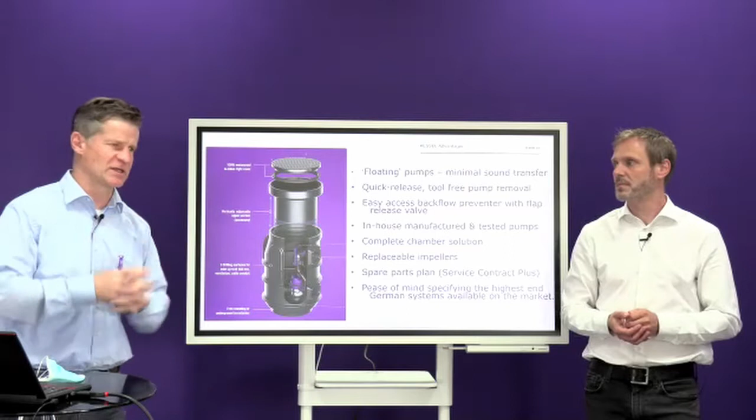Peace of mind when you're specifying these systems. These are the highest end German systems available in the market, on the German market and worldwide. So when you're bringing these to the customers, you don't have to worry about having a nice pump but a control unit that's not up to speed, or a good control unit but a pump you don't like. Everything in the system is ready to go, quality Kessel engineered. So in all your sales talks or meetings, you get the peace of mind that everything in the system has been done properly.

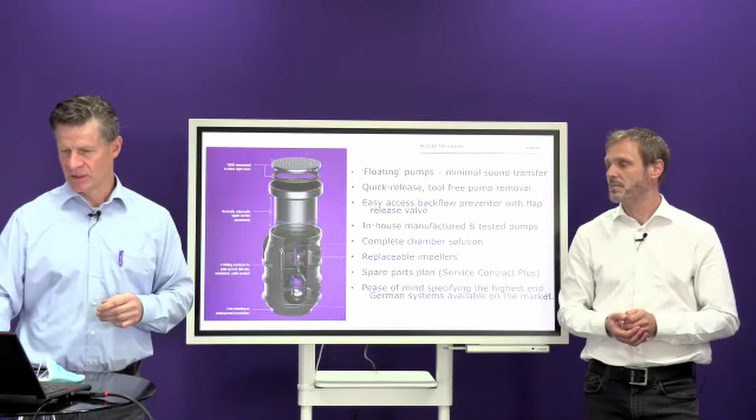So this is from the brochure that's available to download. We sort of went right up front and boldly said: specify it, order it, install it. You'll be glad you did.

Maybe we have some questions and we can answer that. Okay, we got chat box questions. Yes, there's one from South Africa about the Aqualift F Basic.

Regarding article 828711, the non-return valve levers - there is no indication when it is in open or locked position. This is not the flap, I think. Is he talking about the closure valve that's an accessory? No, the non-return valve, it's a backflow preventer. Yeah, but there is a way we can show later. Okay, Gustav, we'll get to your question. Correct, that's internal inside the pump system. I can show it directly on the product.

And another one from Mark: is there any chance that methane gas will be produced? And what about the pump protection for methane gas? So if you have an explosive atmosphere, for example in this special case, this product is not the right choice.

So methane gas will always be produced if you have the ventilation. It's not a big deal. We had a lot of testing with the authorities, where we conducted a lot of tests during the last couple of decades, to be honest, that shows if the product is installed in the right way with the right installation, you don't get the amount of methane gas that could create an explosive atmosphere.

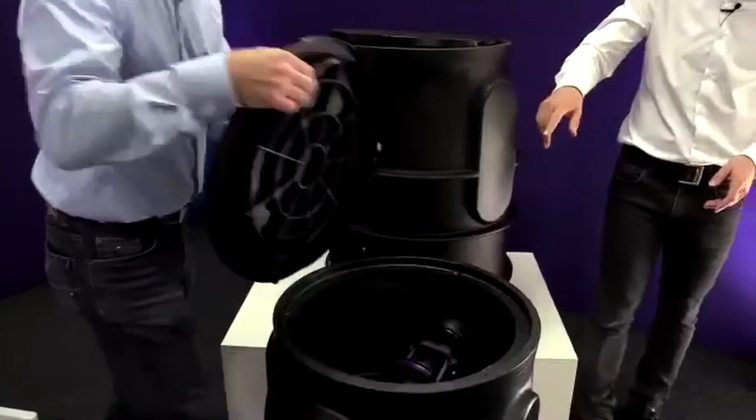First of all, what you see here are both tanks - this is the F version and this is the S version, the gray water and black water version. From the outside you don't see any difference - it's the same connection, the same cover, the same pressure connection. It's nearly the same for the black water and gray water version - nothing changed. Same tank, same connectivity, same system.

You already opened the cover - there's 3 screws, put it out. On top there is the sealing, which comes with the product. Let the camera come a little closer to see the differences. This is the black water version with a quick release to bring the pump out.

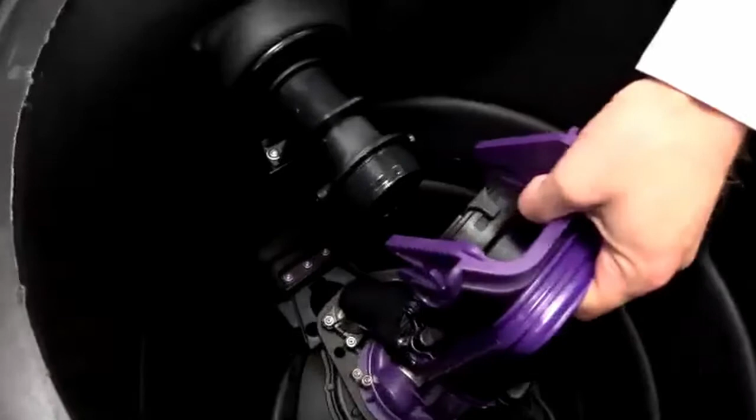If you want to do a little homework, you can do it 5,000 times in 10 minutes. That pump is not sitting on the floor, it's sitting on a bracket suspended above the base of the station. If you switch over to the gray water version, you find the same system we showed before on the Aqualift S100 - same systematics, same flaps, same lever here to open it. This is a smaller pump, the GTF 600, but also.

This is mainly the biggest difference - we can put both out, Eric. Maybe bring out the F version. You see the difference in the sizes of the pressure pipe - the smaller pipe, the bigger flap, the smaller flap that are inside here.

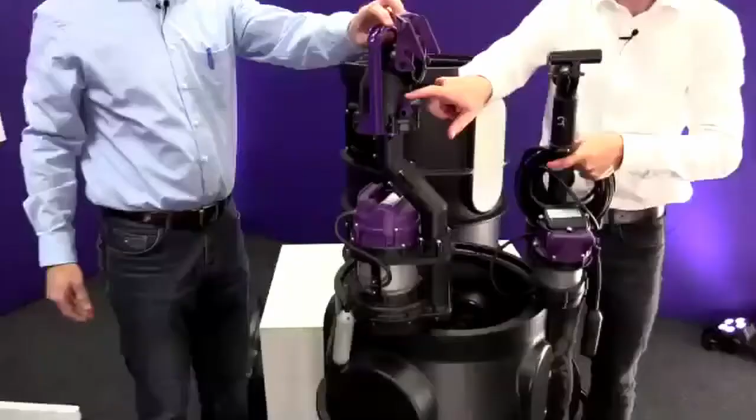This may raise a question on the side here - how do we call it, Eric? This is a non-return flap release to let the water drain back into the tank if you're doing servicing. You can put it in both directions, this way and this way, and if you look it up, it shows which direction the water goes.

This might have been Gustav's question. If it's in this direction, the flap is in automatic mode or free motion working mode. And if you want to open the flap so water can go out of the pressure pipe, you have to bring it to this position. That's just how it is. That was probably Gustav's question.

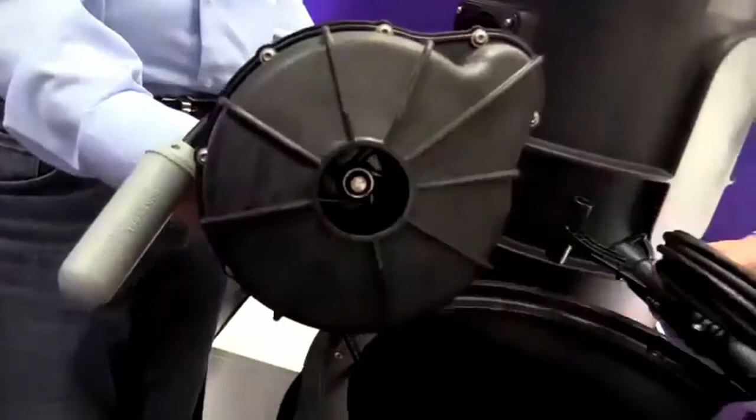So maybe you look - oh, it's not the same pump. But if you look from the bottom of the pump, this one has a 40 millimeter free passage, and this one has a 30 millimeter free passage. It's the same on the bigger pump, but that's different. That helps us reduce the price, smaller pipes, smaller flap, and so on, and take more for black water. But to be honest, these are the main differences for the products. So if you have a black water version, you'll feel comfortable with the gray water versions too. Nothing more to say about that.

Okay, very similar to the above ground systems.

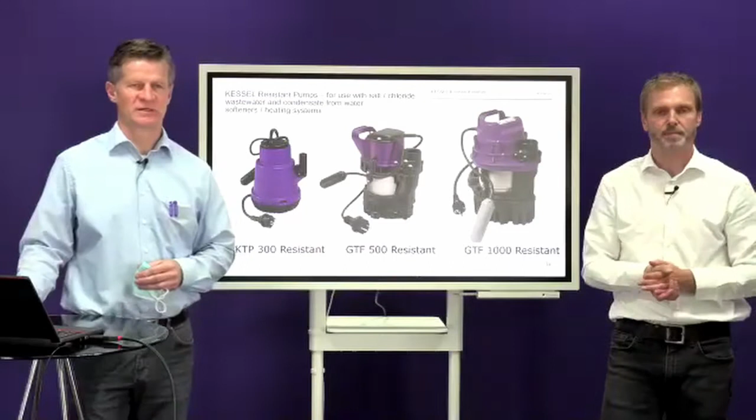I think the protection is, when it's inside the chamber where there is wastewater, that it's safe and tight. Our plastic housing benefits from many years of experience. There's also protection on the pump itself, an IP protection. So if water comes in, a fuse closes, so this is safe, and there's also thermal protection. The pump itself is IP68, so it's really made to be used as a submersible pump, designed to sit underwater for its whole lifetime.

Everything on top, where the cable goes out and where the electricity connects, is really interesting - I don't know the English word, maybe you can help me, Eric. It's 'vergossen' - it's all cast. It costs a lot of money, but it's the highest, best protection you can have for the cable outlet and so on. It's a special hard, waterproof component that keeps water from getting inside, keeps the water outside. Yes, now it becomes more clear.

How deep can a submersible pump be placed into the water? 5 meters, 10 meters, 50 meters? I think I have to check, but I believe we specify 3 meters, though it's tested for much more. 5 meters shouldn't be a problem, minimum.

Are the submersible pumps only single pump models, or can we also use them as a double, in a duo or twin version? Is that possible, for example in a concrete chamber? Yes, we have mono systems and double systems. Mostly, if we have a double system, we use a control unit, but both pumps are available with a floater or with other sensor systems. With our individual solutions we have a lot of possibilities - you can go to Martin or to Eric and ask about a special application.

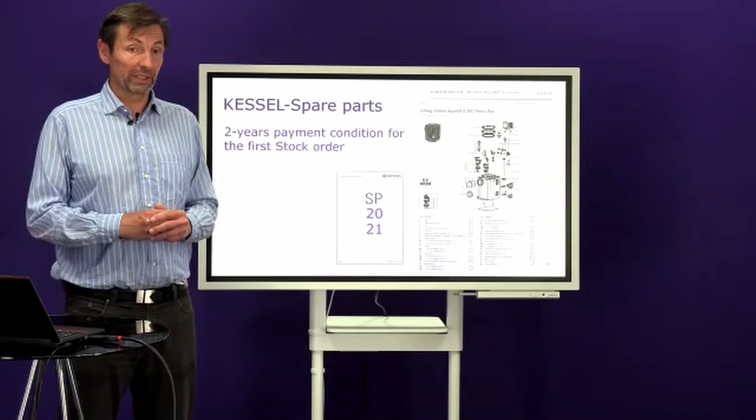We have pretty soon our spare part catalog 2021 available. And then together with Darko, you can make the package for your market. And please think about that, that the spare parts should also be available in your market. Yes, that's it for the spare parts.